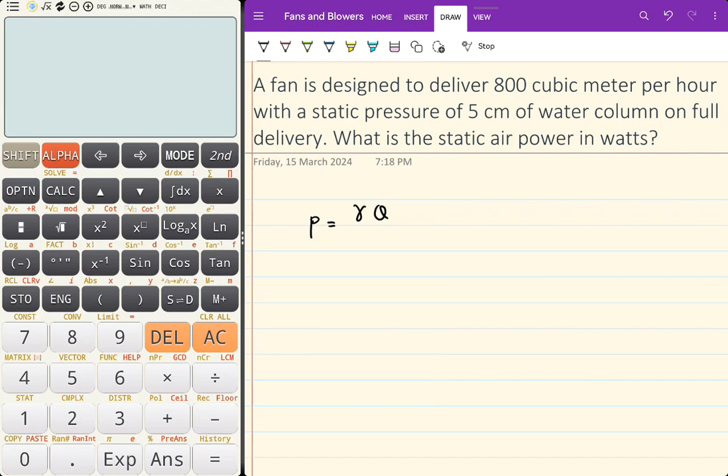Power is equal to gamma Q head total, divide by efficiency ng fluid machine, which is in this case, yung fan. Anong gamma ito? What fluid? And then what head? This is, kapag air gauge ang ginamit mo, dapat this is in air. Kapag air gauge ang ginamit, the total head should always be in air columns. If not, kukonvert mo in water.

Or water din to. H2O, ganun na, dapat iisa lang yung convention niya. So, if you will use gamma air, ganun din yung sa water. Now, let us simplify this one.

Power is equal to gamma ng air, Q, head total in air gauge. Ano ba yung head total? That is equal to, head total ng air, dapat yung velocity head mo naka-air, plus yung static head mo dapat naka-air din. Static head in air gauge.

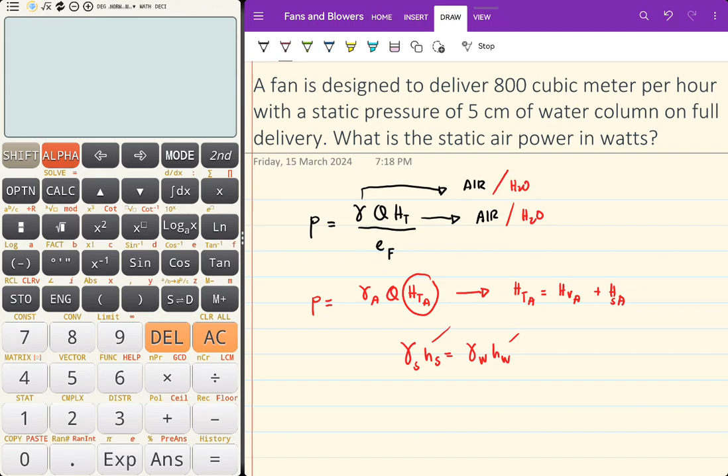So sir, dito tayo. P is equal to gamma ng air, Q of air, tapos head total on the air. But HS is divided by gamma. Diba? Pressure head yan eh. I-divide mo ng gamma. So what will happen?

If dalawa yung magiging gamma mo dyan, gamma A. Tapos, tandaan mo yung HS mo diba? HS is equal to gamma ng water, head of water, divide by gamma S. Yung gamma S mo is air. So, that is what? Palitan natin, gamma ng water, head ng water, divide by gamma ng air. May makakancel ka dyan, which is yung air.

Kaya sinasabi ko sa inyo na kapag water gauge din ang gagamitin nyo. Remember that. This will be equal now to gamma of water, Q of air, and then head ng water. Dapat unified sila. Doon natin nililinaw yon.

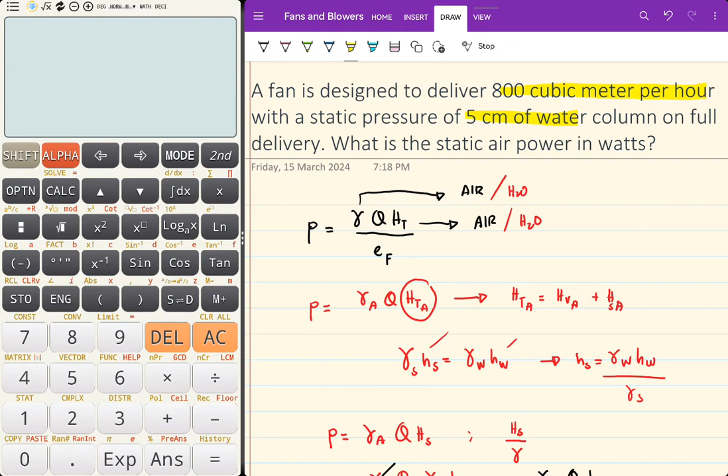So, for question number 1: a fan is designed to deliver 800 cubic meter per hour of air with static pressure of 5 cm water column. So naka-water column siya. On full delivery, what is the static air power in watts? Okay, let us solve that.

So, power is equal to gamma ng air. Gamma ng air, tapos Q, head static ng air. Wala rin binigay yung static efficiency. Wala rin binigay na volumetric efficiency, yung efficiency niya, total efficiency of the fan.

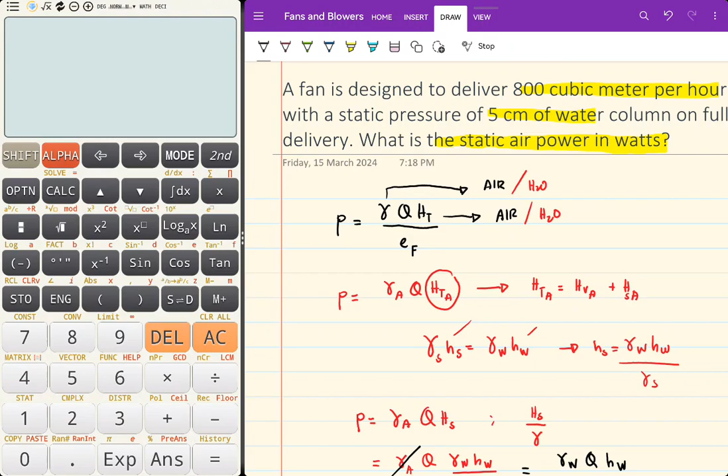So, all you need to do is palitan lang yung HS mo, kasi naka-water gauge siya. Remember, water column or water gauge. So dito, kung gagamitin ko air, ano yung density ng air? Remember that the density of air is equal to 1.2 kilogram per cubic meter, all standard temperature and pressures.

So this is gamma ng density of air times gravity times Q times HS. The problem here is HS is not in air gauge. So i-change mo muna ito, i-change yung HS mo ng air gauge. So, HW, gamma ng water over gamma ng air.

Dito na tayo. So, power is equal to gamma of air, Q of air, HW, gamma ng water divided by gamma of air. So, makancel natin yan. Huwag natin gamitin yung air, gamitin natin yun sa water. So, water is 9.81 kilonewton per cubic meter.

Multiplied to Q. Ano yung Q natin? 800 cubic meter per hour. Tapos, multiply natin ng HW na 5 cm water gauge. So, gawin nating meter: 5 cm times 1 meter every 100 cm. So naka-watts dapat tayo.

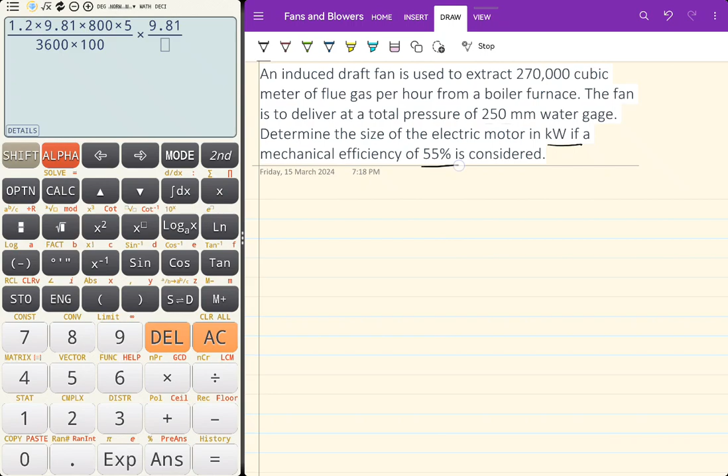So, nasaan yung efficiency? This is the motor. This is the fan. Ayan yung fan mo, nasaan yung mechanical efficiency mo? Dito. Okay, so ano yung Q? Q is 270,000 cubic meter per hour of flue gas. Yan yung gas na tinatanggal mo dyan. You call that as the capacity of the fan. Yung size, okay, tandaan nyo that is the size of the motor ng fan that driving it. Okay, capacity and size. So, motor power ang tinatanong sa'yo dyan.

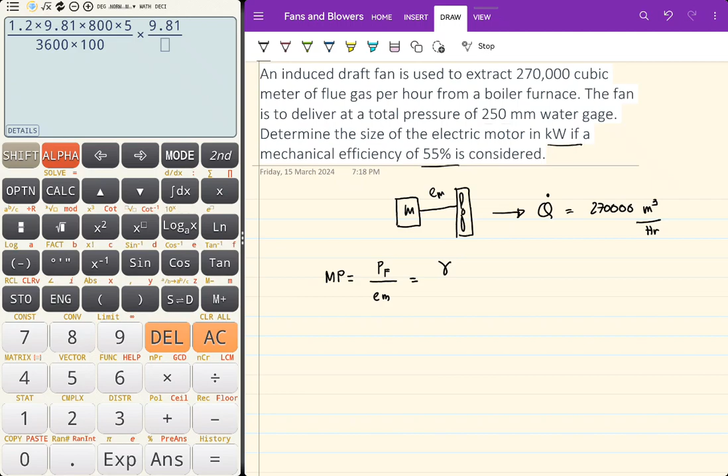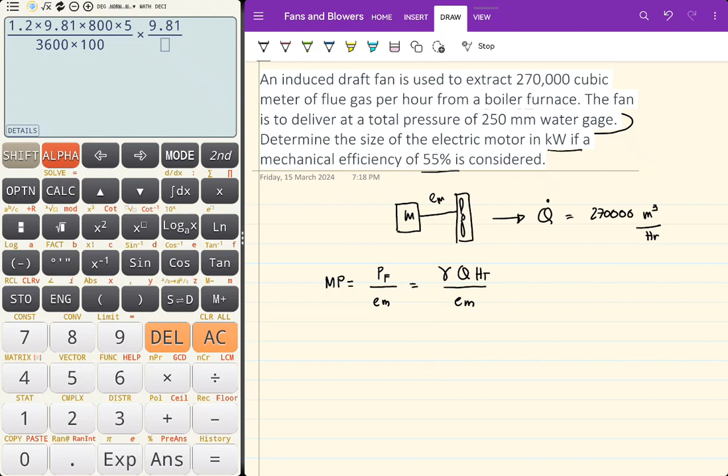The motor power is equal to, okay, power ng fan or the fluid power divided by efficiency ng machine or the mechanical efficiency. So, this will become gamma Q head total divided by EM. Okay, so ang binigay sa'yo dito is water gauge. Okay, naka-water gauge ka dyan, sir. So what you'll do? What you'll do is, simplify mo natin yung HS natin. Okay, so this will become MP is equal to gamma ng air Q H total.

That is, okay, palitan na natin H total, that is HS. Okay, so gamma ng water HW, kasi yun yung binigay dito, 250. Divide by density ng air tapos EM. Cancel natin density ng air. So, this will become, okay, gamma Q HW divide by EM.

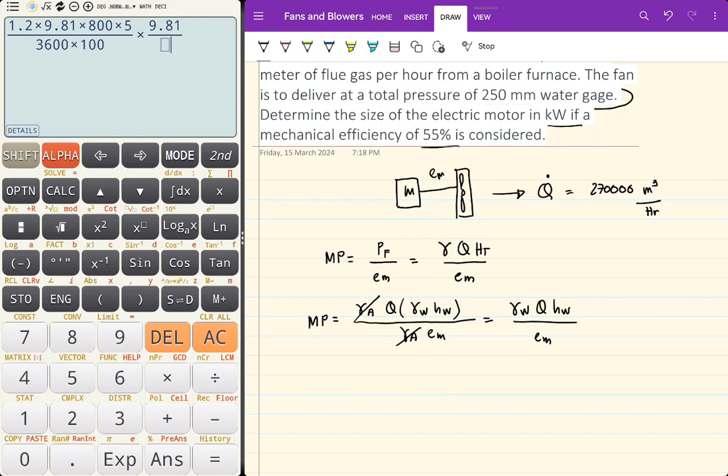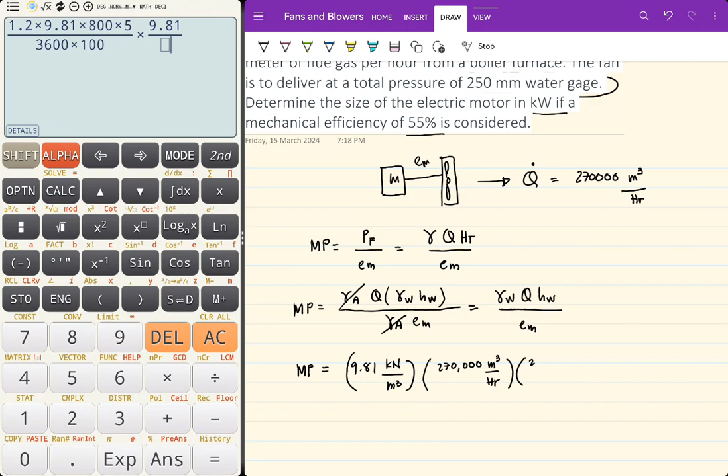Okay, so motor power. So, this is 9.81 kilonewton every cubic meter, that is for water. Times Q na 270,000 meter cube per hour, times papalitan natin HW na 250 mm. Gawin ko ng meter, divide ko lang ng 1,000 meter. So, cancel all same units. Ito.

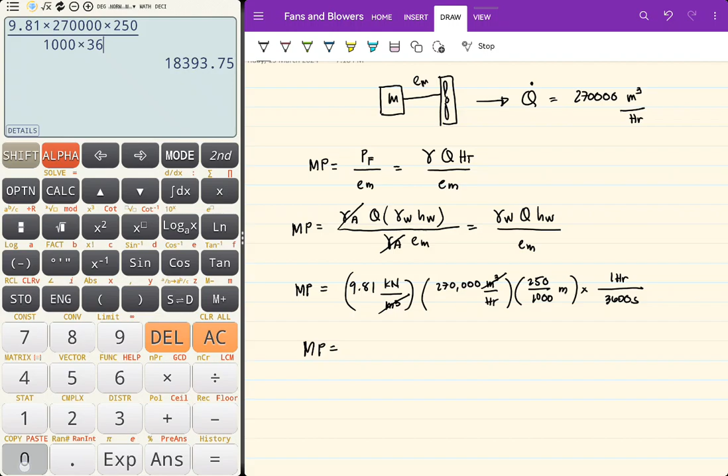Kilonewton meter is kilojoule per hour. Times mo na lang to ng 1 hour every 3,600 seconds para maging kilowatts. So, the motor power is 9.81 times 270,000 times 250 divide by 1,000 times 3,600. So, the power is, wala pa yung ating efficiency.

The efficiency is 55%, 0.55. Divide by 0.55. The answer is 334.432 kilowatts. That is the motor power.

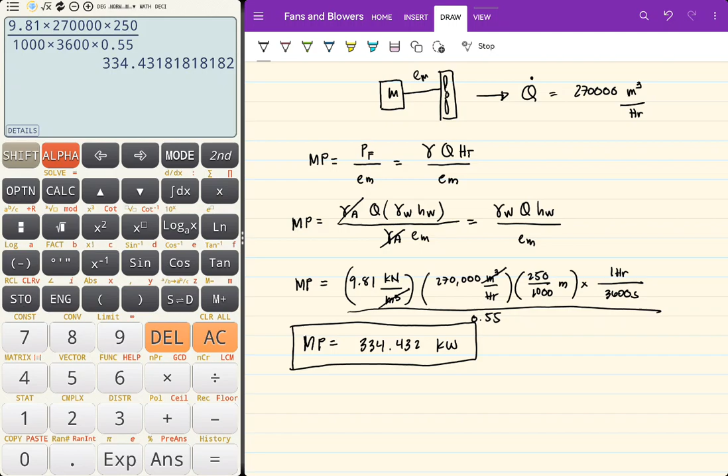The motor power. Dali lang naman ng fan, parang pumps lang. Ang kinaiba lang is meron kang static efficiency tsaka static head tsaka velocity head based on the fan, naka-air gauge. Next problem.

For number 3, according here, so what is the horsepower supplied to air moving at 30 FPM? Ano FPM? That is feet per minute. Through a circular duct with a radius of 1 foot under a pressure of 6-inch water gauge. Diyan ka na magkakatalo-talo.

Okay, meron ka daw velocity of the air, that is 30 foot per minute. So dito tayo, Q is equal to area times velocity. Kukuha mo yung Q. So, the area is pi divided by 4 d squared, velocity.

Tapos, yung power mo is gamma ng air, Q, head total. Nagbigay ba dyan? Water gauge na naman. So, you need to change itong HT, HS is equal to HW, gamma ng water, over gamma ng air. So simplify natin: P is equal to gamma ng air times pi divided by 4, diameter ng duct squared, velocity ng air, times yung head ng water, gamma ng water, divide by gamma ng air. Canceling natin yung gamma ng air, we will now arrive with this equation: pi divide by 4, d squared velocity, tapos HW gamma W, divide by 4 na nga lang.

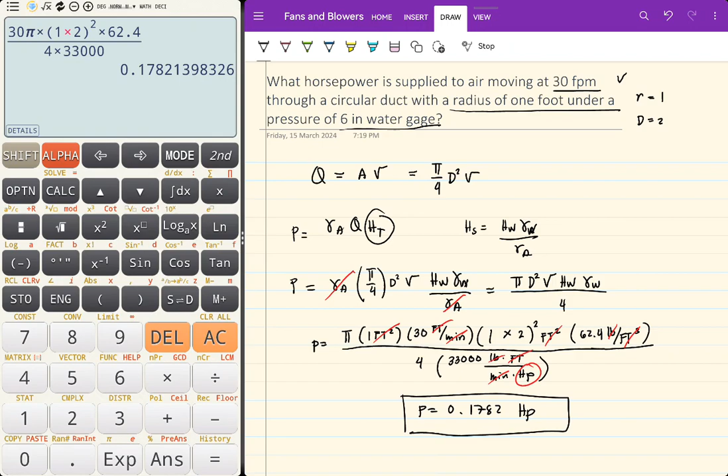0.1782 HP. Okay, next problem. So let us read this.

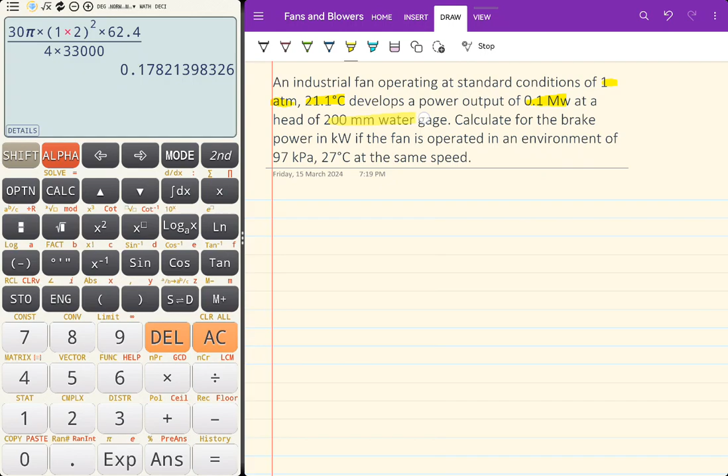An industrial fan operating at standard conditions of 1 atm, 21.1 degrees Celsius, develops a power output of 0.1 megawatts at a head of 200 mm water gauge. Calculate the brake power if the fan is operated in an environment at the same speed.

Same speed, meaning we will use the affinity law for fans. This is a fan affinity law problem.

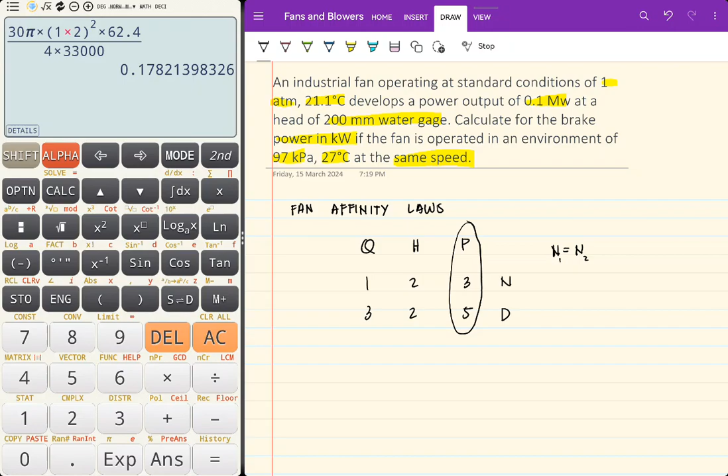Where do we start? From D. What we're looking for is the brake power. So, P1 is equal to 1 atm, T1 is equal to 21 degrees Celsius, brake power is 0.1 megawatts, and the head is 200 mm water gauge.

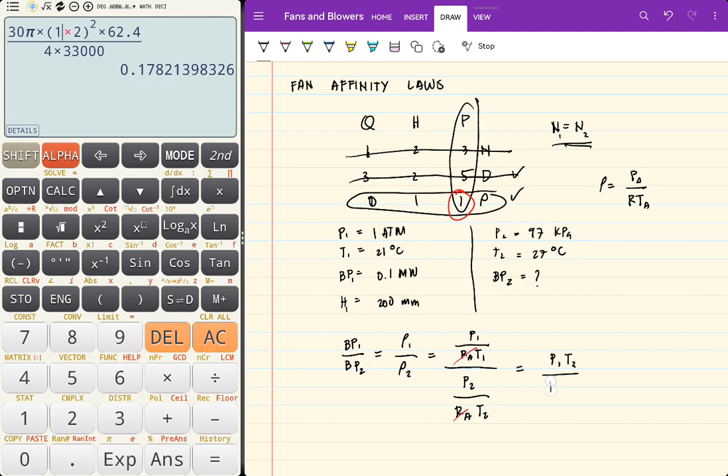Flipped. Therefore, BP1 over BP2 is equal to pressure 1, temperature 2 over pressure 2, temperature 1. What I need is brake power at 2, so BP2...

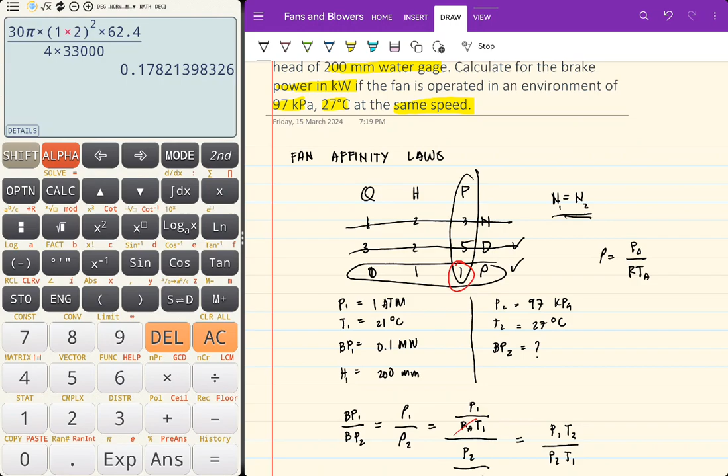Brake power 2 is equal to BP1 multiplied by P2 T1 divided by P1 T2. Simplify: brake power 2 equal to, what's the BP1, what answer is needed here? Kilowatts. It should be in kilowatts. So, 0.1 megawatts times...

1,000 kilowatts per 1 megawatt, times the pressure. What is the pressure at 2? That is 97 kPa. 97 kPa times temperature 1, that is 21.

Megawatt, megawatt, kPa, kPa, Kelvin, Kelvin cancel out, leaving kilowatts. So plug in the values: 0.1 times 1,000 times 97 times (21 plus 273), divided by 101.325 times (27 plus 273). So the answer is...

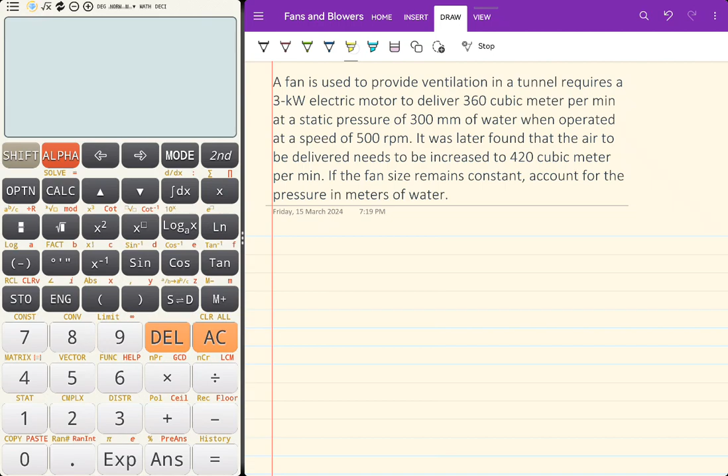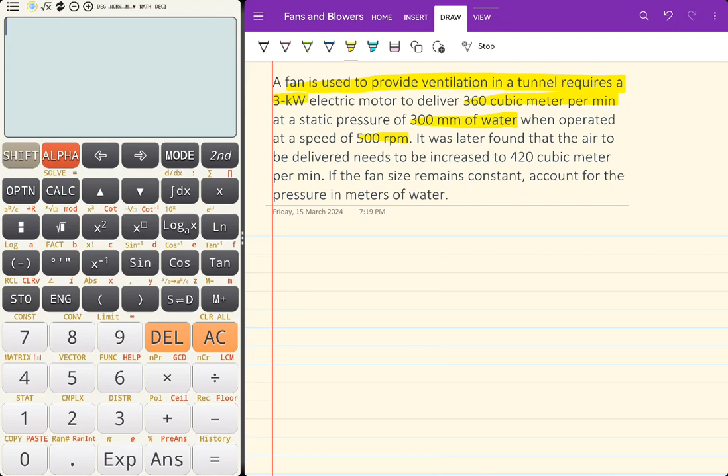A fan is used to provide ventilation for a tunnel. It requires a 3 kilowatt electric motor to deliver 360 cubic meters per minute at static pressure, when operated at a speed of 500 RPM. It was later found that the air to be delivered needs to be increased, the Q is changed. If the fan size remains constant, meaning D1 is equal to D2, account for the pressure in meters of water.

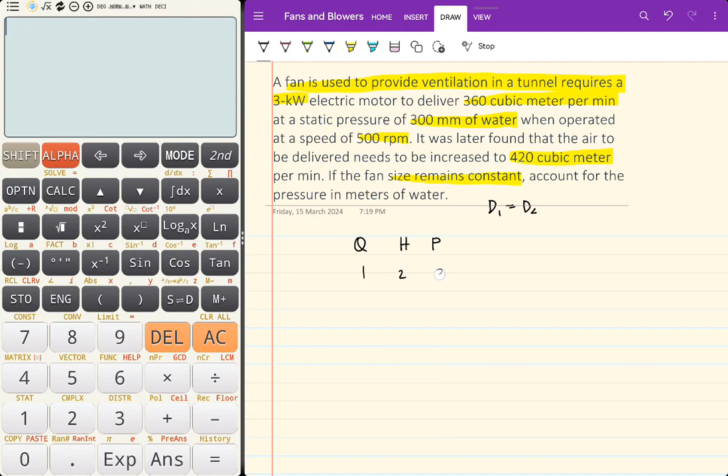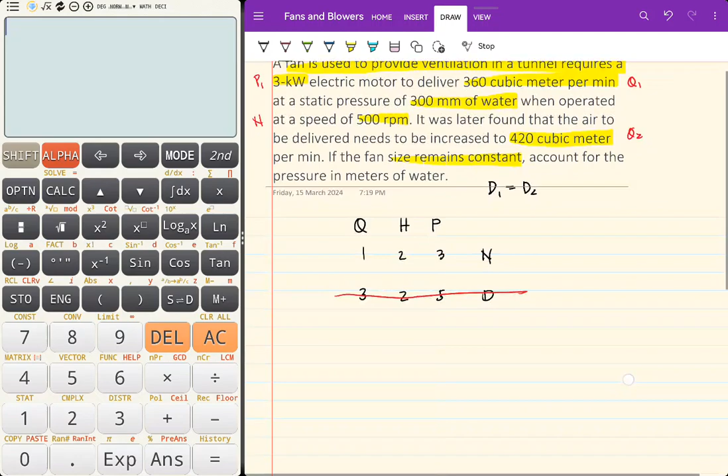Wala akong N2 dyan. Hanapin ko muna si N2. So, meron akong Q2. Dito ko yayari.

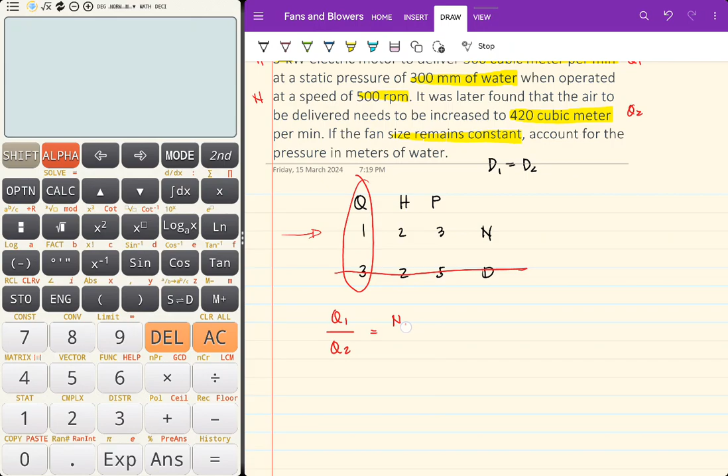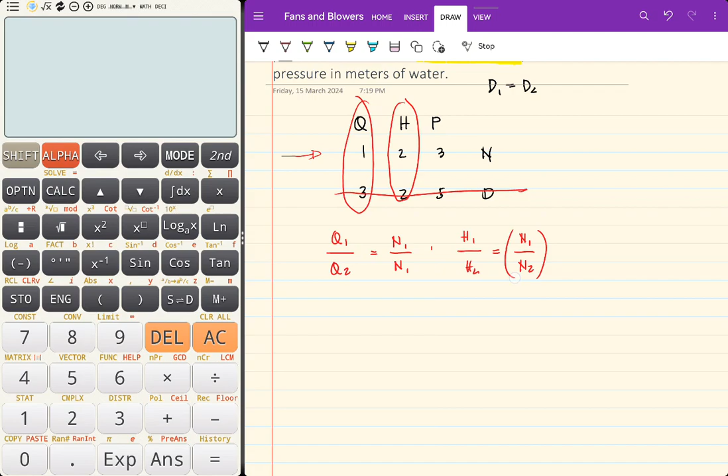Q1 over Q2 is equal to N1 over N2. Ang power is 1. Next, dito naman sa head. Head 1 over head 2 is equal to N1 over N2, tapos naka-squared. May power ba tayo dyan? Ang hinahanap lang naman is the pressure or the head in meters.

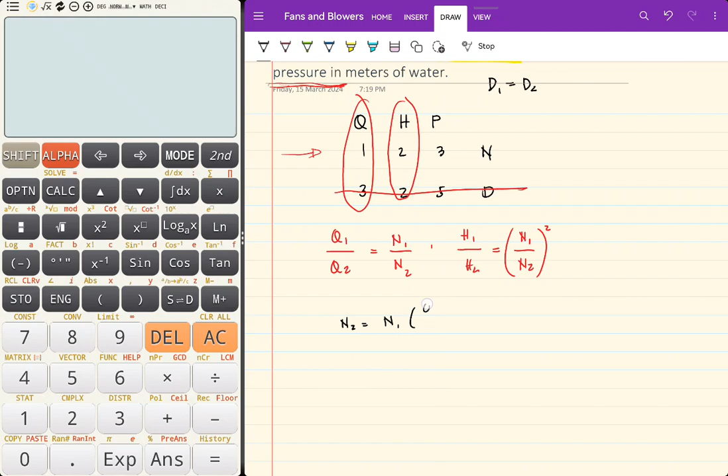So, dito na ako, diretso na kagad. Hanapin ko muna si N2. Therefore, N2 is equal to N1 times Q2 over Q1. Yung N1 natin is 500 RPM.

500 RPM, yung Q2 is 420 cubic meter per minute. 420, non-unit mo na yan, divide by 360. So, 500 times 420 divided by 360. So, this is 583.3333 RPM, kasi cancel na units dyan. Okay, this is N2, store natin siya kay A.

Kaya hanapin ko na ngayon si H2. H1 over H2 is equal to N1 over N2 squared. So, H2 is equal to H1 divide by N1 over N2 squared.

Ano yung H1 ko? H1 is 300 millimeters of water. Gawin ko ng meter, so 300 divide by 1,000 meters of water. Divide by N1 is 500 RPM, so 500 divide by 583.3333. Huwag na natin lagyan ng unit kasi makakancel lang. So, naka-squared to.

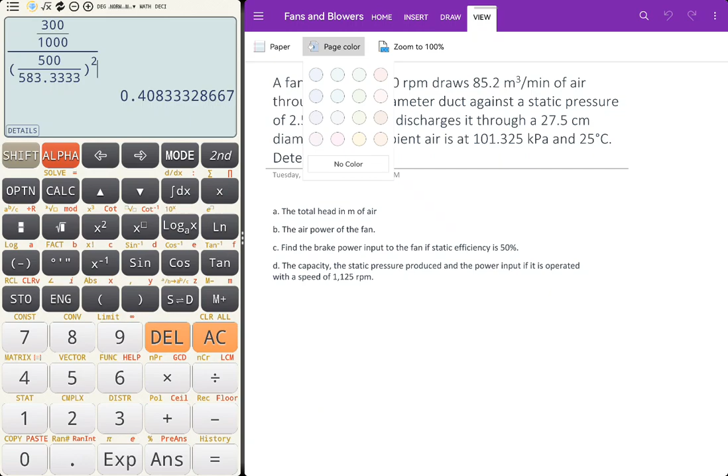Okay, ito medyo mahaba na problem, so let's go with this one. A fan running at 750 RPM draws 85.2 cubic meters per minute through a 30 cm diameter duct against a static pressure of 2.54 cm water gauge and discharges it through a 27.5 cm diameter duct.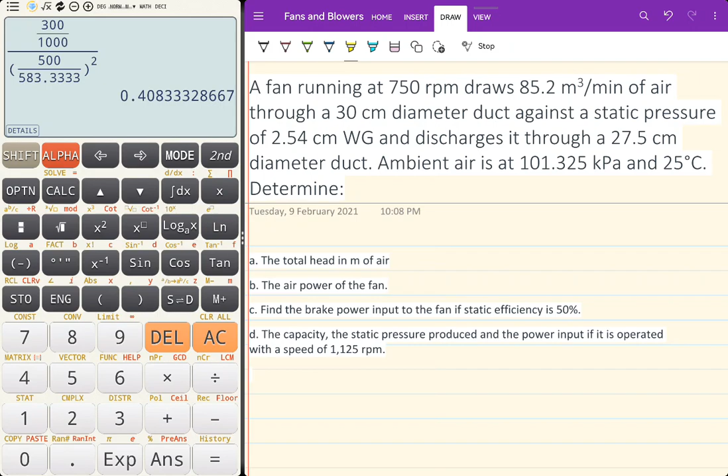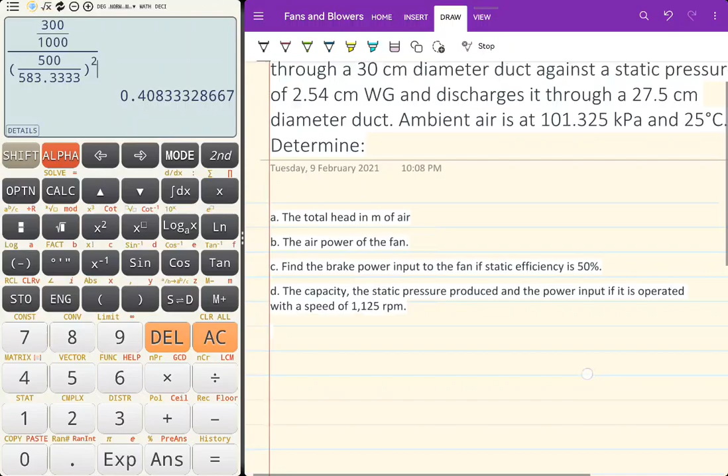Ambient air is 101.325 kPa and 25 degrees Celsius. Hanapin daw yung total head in meters of air. So, ano ba yung total head?

Total head, HT is equal to HV plus HS. Hanapin ko muna si HV. Yung HV kasi, that is velocity head, this is V squared over 2G.

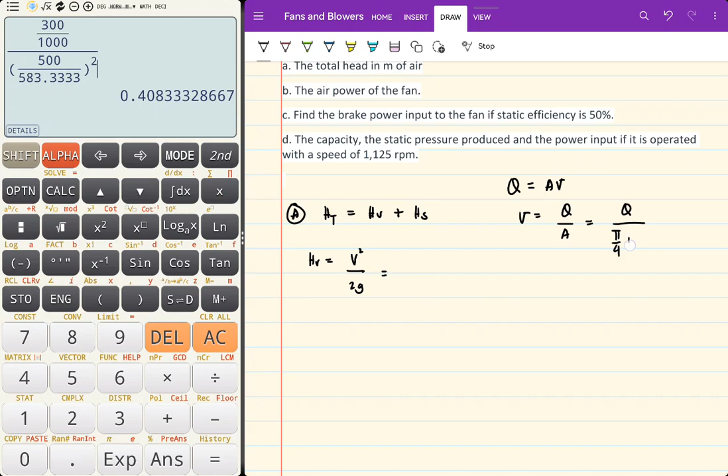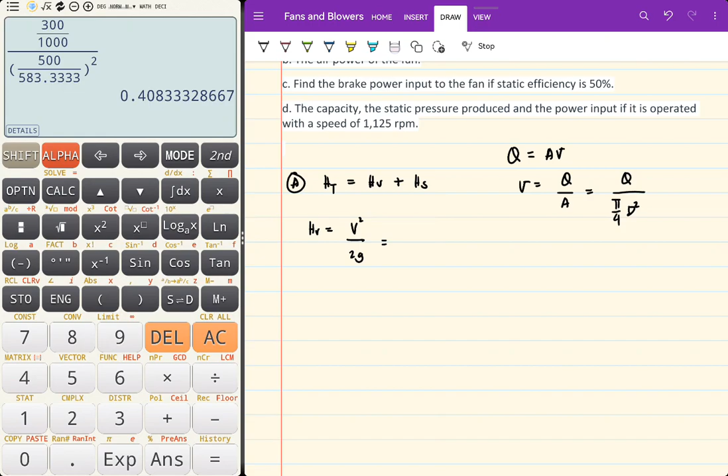Remember that. Saan ko mahanap si V squared? Simply, yung V is from Q is equal to AV. Velocity is equal to Q divided by A, where A is pi over 4 D squared, diameter ng duct. So, meron kang dalawa, changes in velocity: V2 squared minus V1 squared.

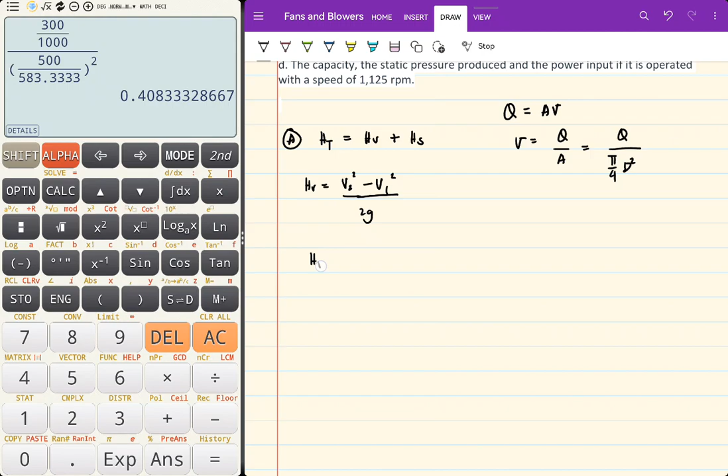Hanapin muna natin si V1. Pwede namang isaksak mo diretsahan sa HV. Alam mo na ang velocity is equal to 4Q over pi D squared. So, this will become 4Q over pi diameter 2 squared, tapos naka-square to, minus 4Q over pi diameter 1 squared, squared, divide by 2G.

Ito naka-meters of air. Remember that, naka-meters of air yan. So, HV is equal to...

4Q, dapat meters, cubic meter per second. Yung Q natin, change na natin. Q is 85.2 cubic meter per minute, times ko na agad to ng 1 minute every 60 seconds, cancel si minute. Q is equal to 85.2 divided by 60, that is 1.42 cubic meter every second.

1.42 cubic meter every second, divide by pi. Yung diameter natin dapat naka-meters na, so meron kang 30 cm tsaka 27.5. So, 27.5 divide by 100 meters, tas squared.

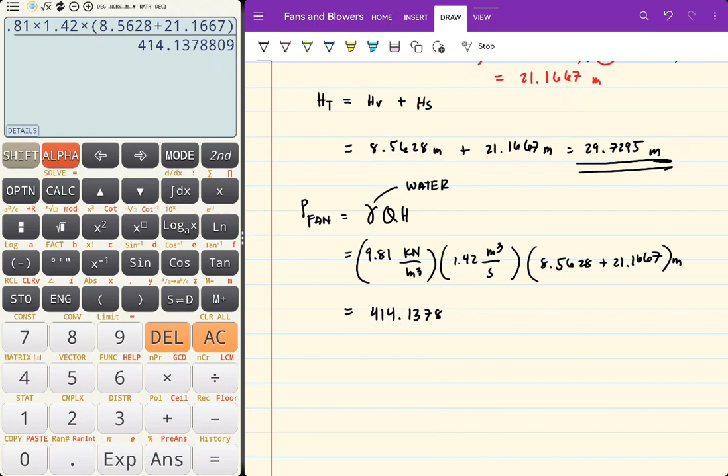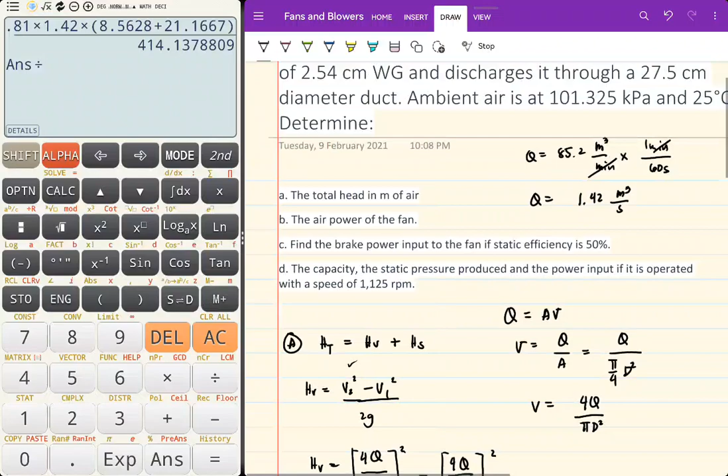Okay, that is for the fan power. Paano naman yung brake power, BP? BP is equal to power ng fan divide by EM. Divide ko na lang to ng 50%, so 0.5. So 828.276 kilowatts. Okay, next question.

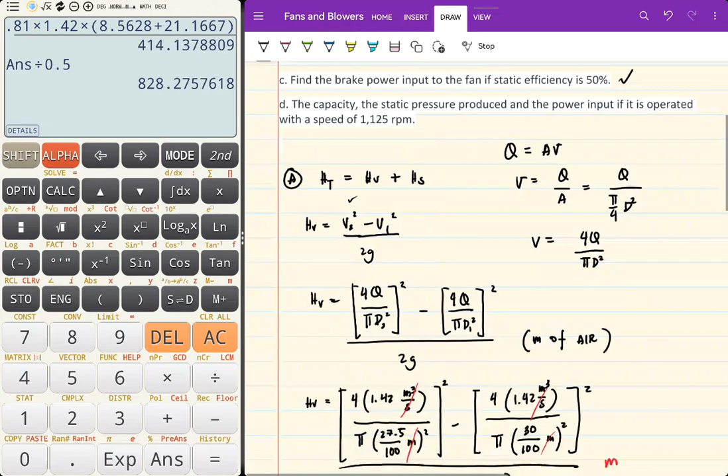The capacity, static pressure produced of the fan power input if it is operated with a speed of 1125. Nagbago lang yung speed, so meron tayong speed change. N1 is 750 RPM, ito yung D. Tapos, N2 is equal to 1125 RPM.

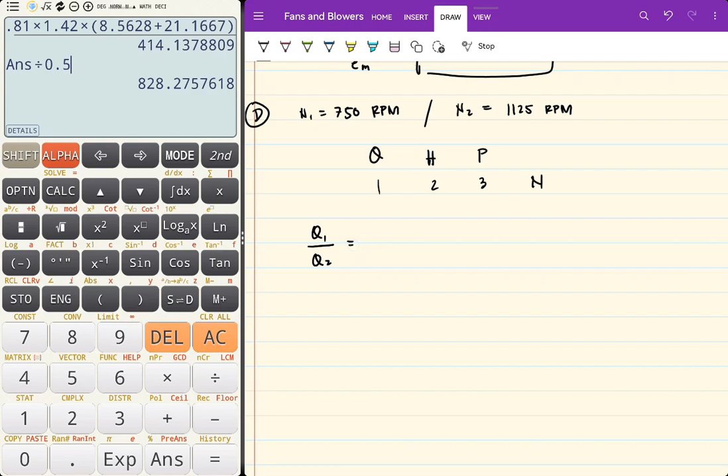Affinity law, Q, H, P. 1, 2, 3, N. Hindi siya nagbago ng size, huwag mo na isama si D. Q1 over Q2 is equal to N1 divided by N2. Hinahanap natin is capacity, Q2. Q2 is equal to Q1 N1 divided by N2.

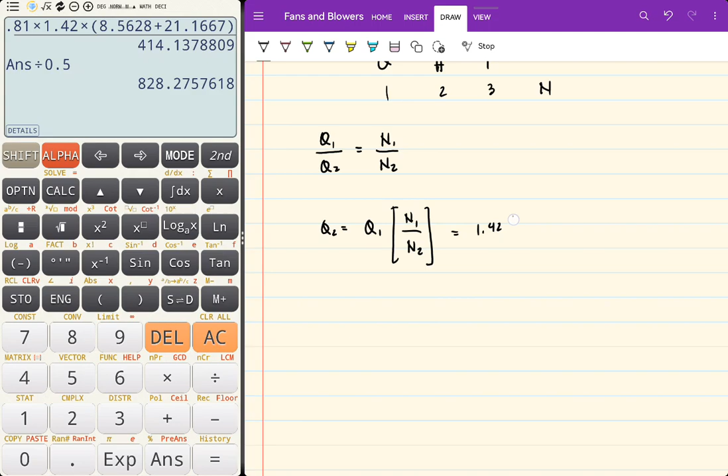So Q1 is 1.42 cubic meter every second, times N1 is 750 divided by 1125. So 1.42 times 750 divided by 1125. So, 0.9467 cubic meter every second.

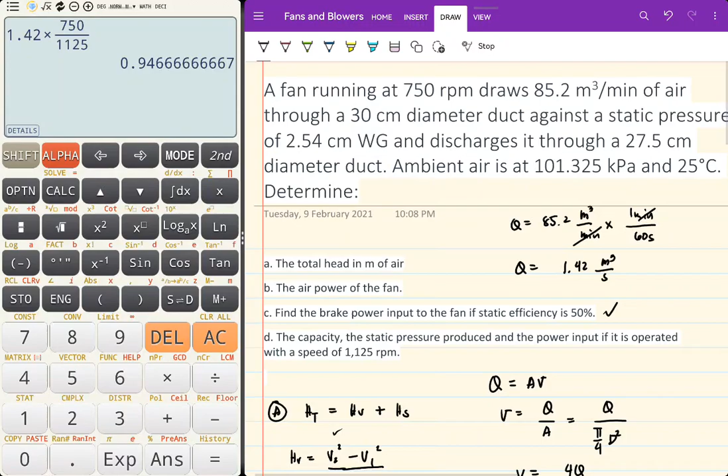That is the capacity. Next, ang hinahanap is static pressure o the H. H1 over H2 is equal to N1 over N2 naka-squared. So H2 is equal to... oh may mali pala ako, Q2 pala yung nahanap, kaya pala lumiit. So nakita ko na yung pinagkamali ko. Kaya nagtataka ko. So Q2 is equal to N2 over N1.

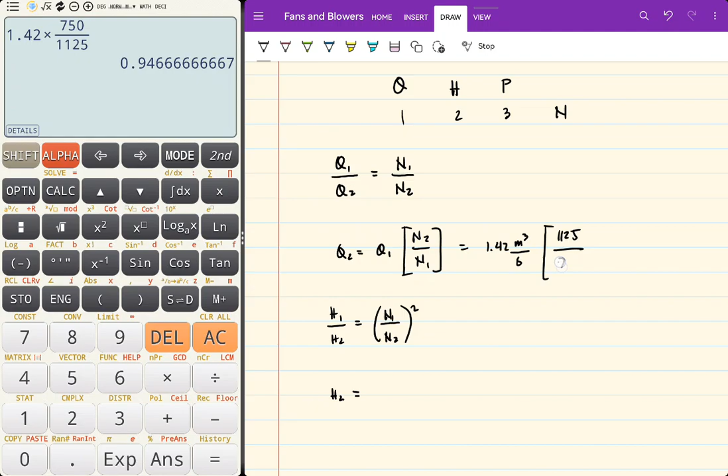Ayan, so this is 1.42 cubic meter every second times 1125 divided by 750. Lalaki nga. So 1.42 times 1125 divided by 750. So, 2.13 meter cube every second.

Next, yung H2 natin is equal to H1 divided by N1 over N2 squared. Yung H1 natin, static pressure, ito yun, 2.54 cm water gauge. N1 is 750 divided by 1125, square the value. So 2.54, 750, 1125, that's square. So this is 5.715 cm squared.

Ayan, nakuha natin yung sagot. Ay, cm squared, no, cm lang. Next is, mahaba yung problem, power input.

Okay, the power input. So BP1 over BP2 equal to naka 3, so N1 over N2 cube. So BP2 is equal to N, equal to BP1 over N1 N2, tapos naka-cube. Ayan, so ano yung power natin dito?

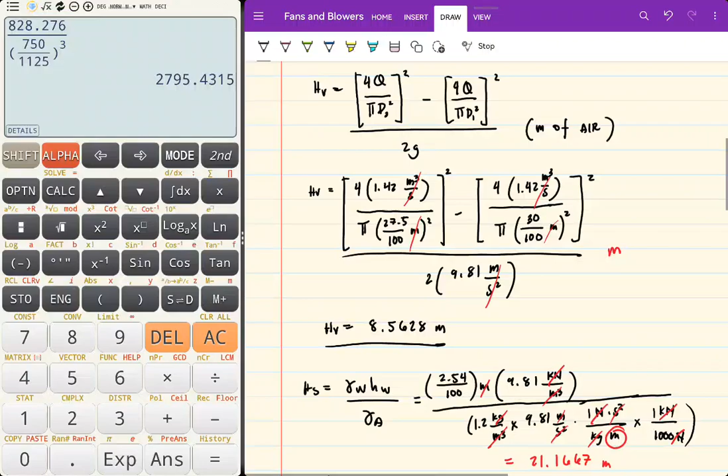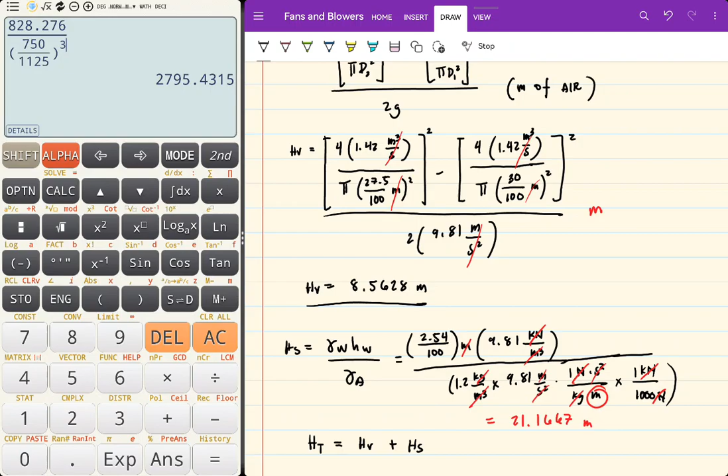That is very long. So that is the answer for that following problem.